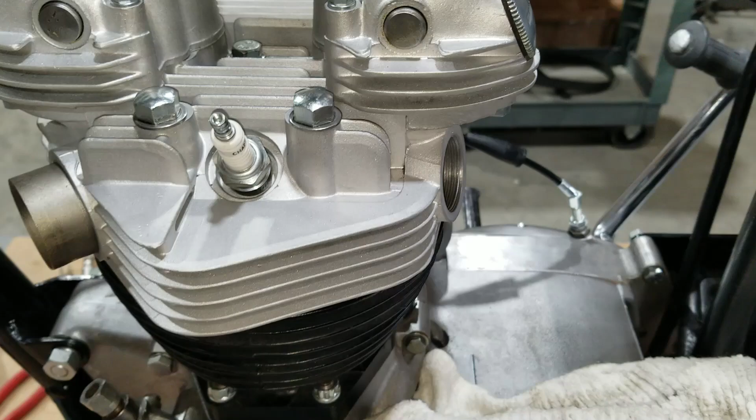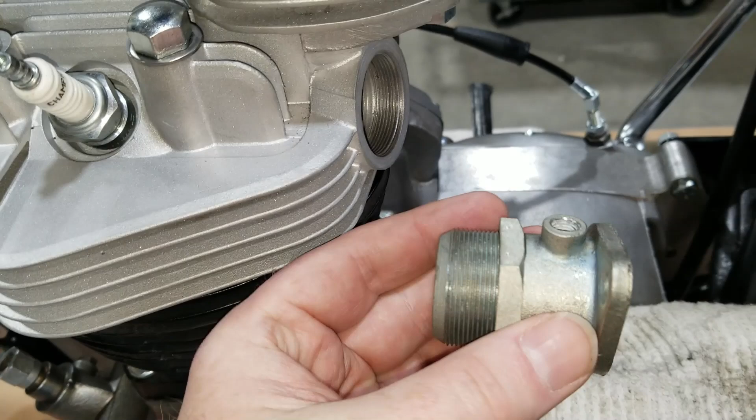We're going to be working on putting the manifolds on for the carburetors, and they look like this. When you go to put these on, you can't have the crossover tube in here because it'll bang into the rocker box. You want to run these in as far as you can, then use the nut to tighten it up, and make sure the carburetors are straight when you do that. We'll show all that coming up, and then we'll probably do some other stuff like the rear fender, and the bike will start taking shape here. So let's get working on it.

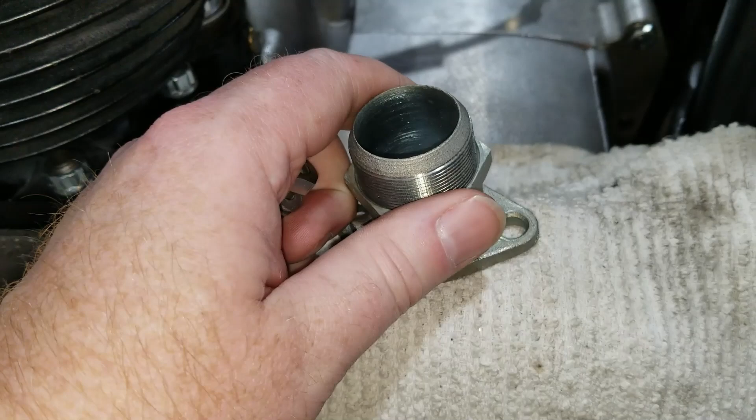On these manifold pieces, this is a 68, an older style. In 69, they worked on putting a stud in here that would come through and out. So this one gets a bolt, a special bolt, a hex nut, and a couple washers. This bolt is so special that the head is really small, so it clears everything here. And there's like a 1.5 inch nut here, and you need almost like a special wrench to get in here and do this. So we'll have that out too and use it. But I just want to point out the difference between 68 and 69 here, this part.

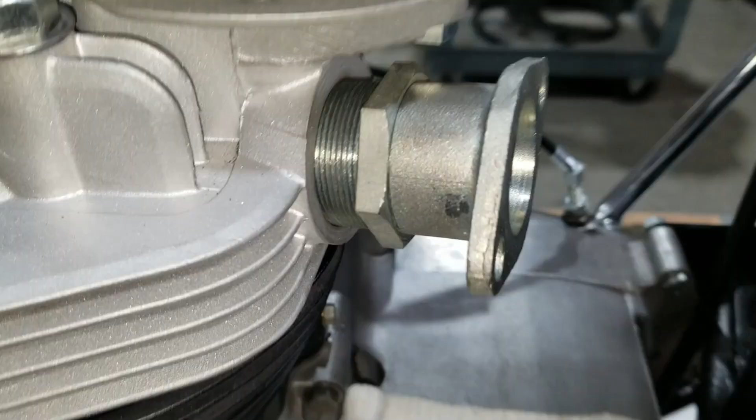When threading these on, we've got to make sure we put the right one on the right side. This crossover tube goes to the bottom, not to the top. Otherwise you'd probably have a problem, and it needs to be facing inward, not outward. So we'll thread it in as far as we can, and then make sure it's parallel with each other.

Okay, that's not going to work. So we'll have to back it off to about here, and then we'll go from there.

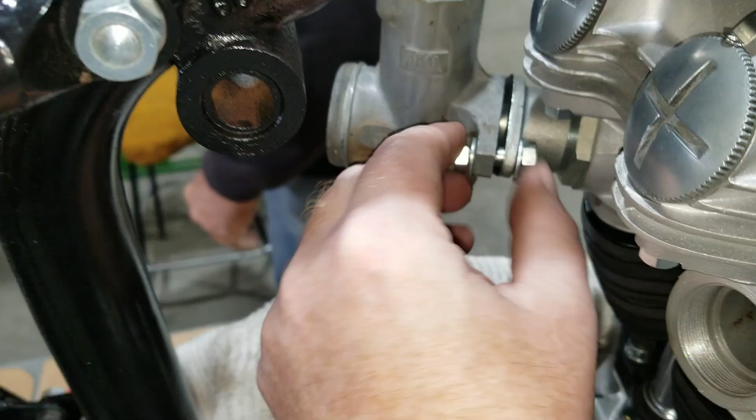Okay, so I can see why they went to a stud in 69. We got to tinker with getting this all together with the big old sandwich here. And of course, we didn't put the fiber insulating block in there, but we're using a body of a carburetor to help us with getting this parallel.

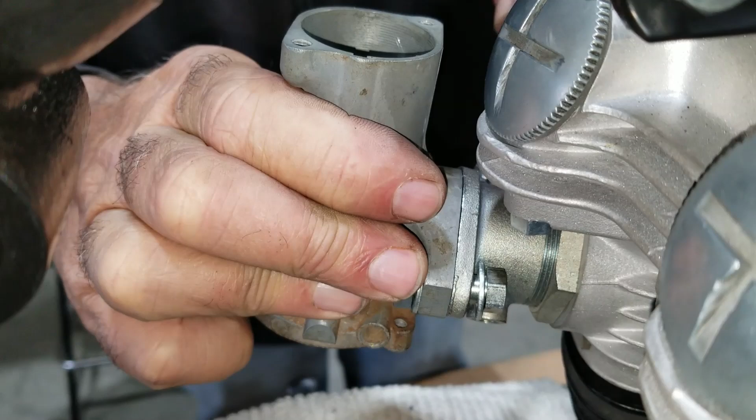So we're going to finish tightening this up to where it's flat, and you push down. The reason why we're doing this is because we don't want this carburetor to be crooked just a little bit. We've seen other bikes where it's just a little bit off and it looks funny, like tilted one way or the other. And that's not what we want. So we want it to be flush or flat.

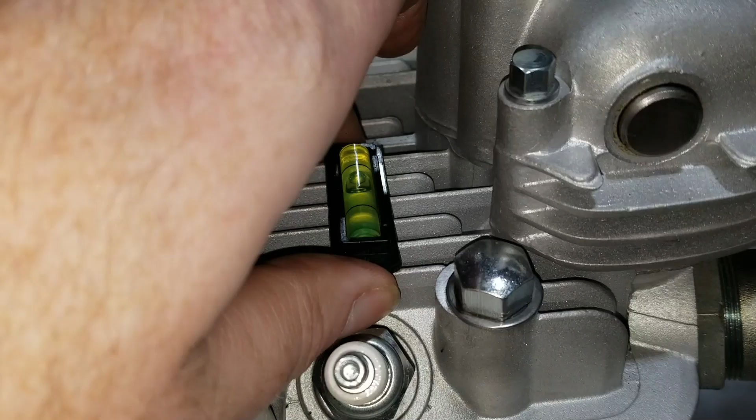Okay, now you're going to have to help over here. All right, so we're going to make sure we're starting off level. I got a little level piece here. The motor's level, and that's showing that the motor's level here.

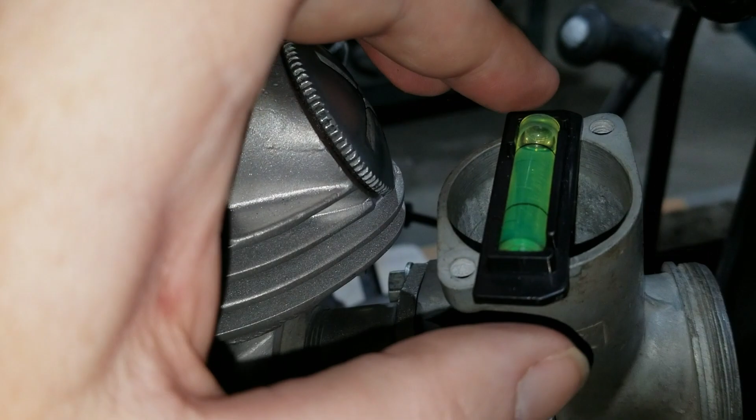Now we're going to take this thing and set it on top of the carburetor body, and it'll tell us where we need to be till we're the same as the engine. So somewhere there, yeah, right about there. A little more. There, it's right in the middle.

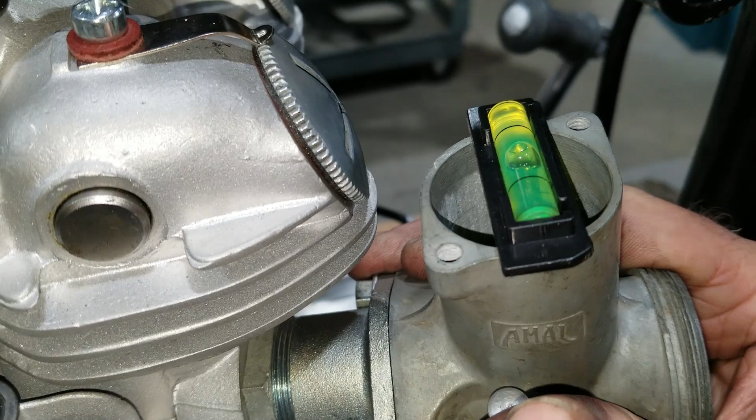Okay, now we've got to tighten this nut up without moving all this. So let's work on that here.

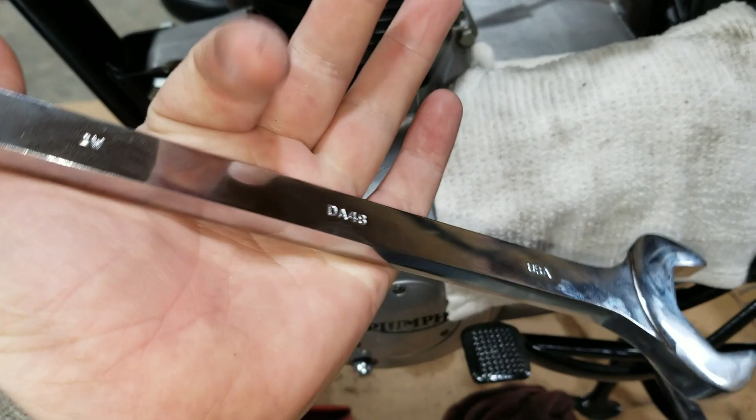Well, here's kind of the special wrench we got to do this with. It's a Mac wrench, it's just got special positions where the heads, the open end parts, are at, so we can get in here and clear the rocker box and everything in certain positions. Seems to work out pretty good. We have this one set for right in the middle.

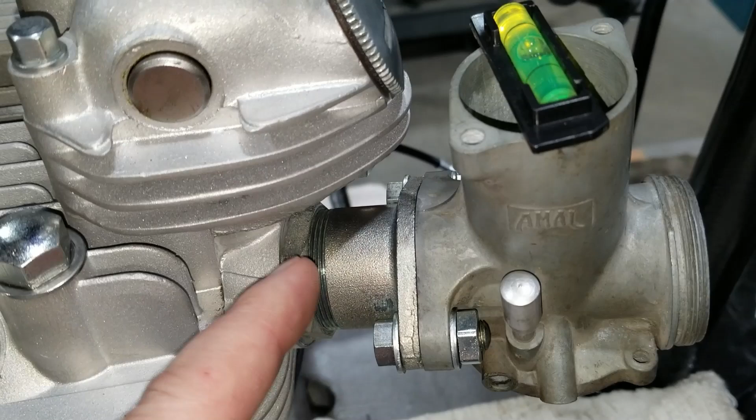We'll try to video record us doing the next one. It's kind of difficult because you gotta compensate for this wanting to turn as you're tightening that. So you gotta put this at a weird angle and then hope that you line up when you get this tight, hope that it ends up being here. You have to do it a few times probably before you can finally get it, because you want that to be as tight as possible.

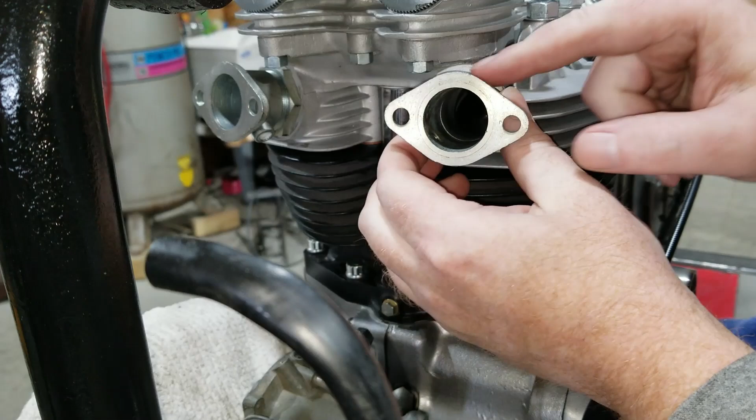Okay, so when we go to tighten this one's going to want to rotate this direction this time. The other one wanted to go the other way, but we're going to have to start here. Well, it was still the same way, just we're going to start over here at a different angle, and then when it tightens up, it'll be like where we want it. So let's...

And I definitely like the 69 style manifolds more than this one. I guess we could have ordered those. Yeah.

When he redid the head, he took them off, of course, and they were all rusty, and I just didn't want to have them all rusty looking. And you got the hex nut up there? Yeah, I got mine.

All right, with pushing down on the carburetor body, we could know that we're like flat against the surface there. There's a little bit of wiggle room on that carburetor body, so we got it tight.

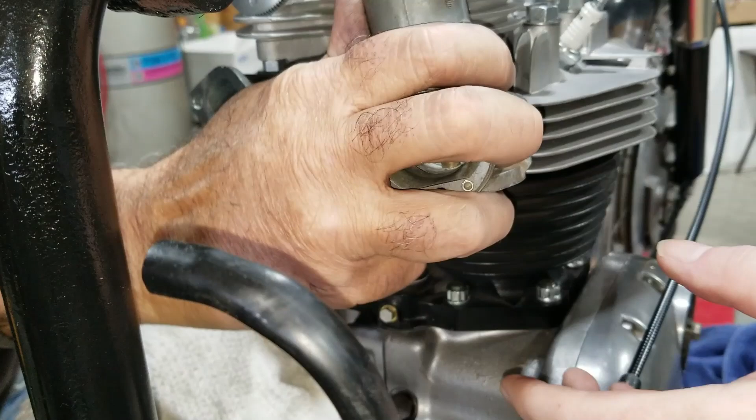All right, so we're gonna put it on there like this and see how close we get here. Got the carburetor at a massively crazy angle.

All right, that's pretty tight. Where we at yet? Oh, too much yet. Yeah, you need to, wait a minute. This end needs to go down. So it either needs to go tighter or you need to move the carburetor.

Yep. Yeah, I was able to get it tighter. Hey, we got it, looks like. Yeah, I'd say so. No, too much. Needs to, gotta have this square. Yeah, okay, we gotta go some more yet. It's gotta...

Raise. I don't know if I can. I don't know if I can get more out of it. Let me just check it. Don't strip it. Yeah.

That tight, see? Yeah, that's pretty tight. That's way too tight.

All right, so I just got done tightening this down. Just gonna check it again. Yeah, it's pretty tight. Anyways, we loosened these bolts up too to do the fine tuning, and we can kind of get it.

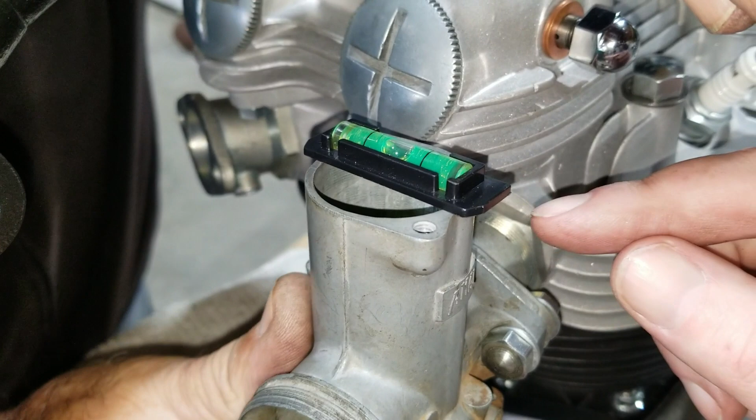Yeah, looking pretty good. Yep. Yeah, so we got this pretty much in the ballpark, a pretty good spot for this flange, but then we can wiggle this around a little bit, and we can get it right in center. So when we go to put the real carbs on, we'll be able to tinker with this and get the fine-tune adjustment in.

Then we go to put our slides in, the top there, and that's when we'll do this measurement again and see where we need to actually line this up and then tighten the carburetor down. But we have these in the spot where we need them at now.

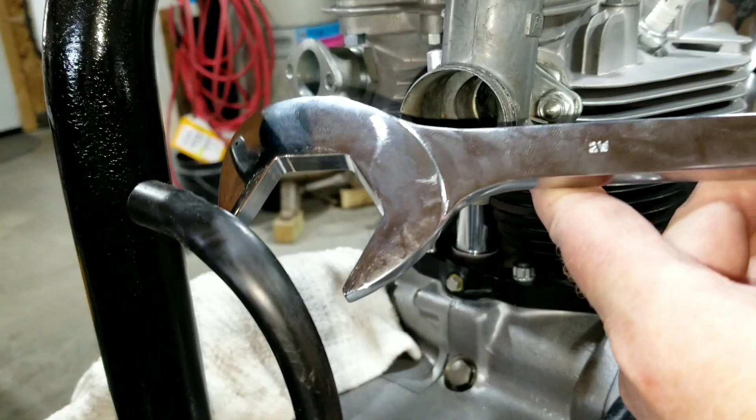Next, we'll move on to putting the little ports in here and put our little hose on there. And if you like that wrench that we used, you can look for it. It's the part number for the mech is DA48, and it just seems to fit really good in the spots here.

Anyway, so 1.5 inches. Okay, so here we go. We got the nipples installed there, and we have the equalizing tube installed. This helps with pressure in each, equalizing it, on each port.

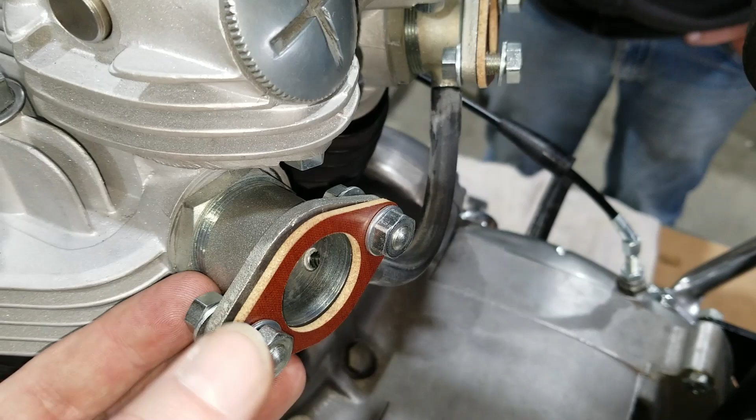And these port flanges here are pretty much the same on all the monoblock and the later Amals. They're all the same here. There's different ports though, because some of them don't have the nipple here, and we obviously know the difference between the 68 style and the 69 because the studs aren't here in 69, and like the 71 head and stuff.

We were getting ready to put these on, and my father was like, these don't look right. I had to verify that they were the correct ones, 468s. That's how I got them.

And pre-unit ones are different. Also, they don't have that crossover port either. So, and I'm pretty sure all the diameter here is pretty much all the same, but I'm not for sure on that. But anyways, I have all the hardware laying here so I don't lose it when we get ready to put the carbs on for good.

And yeah, I think we'll end up moving on to putting the rear fender on next.

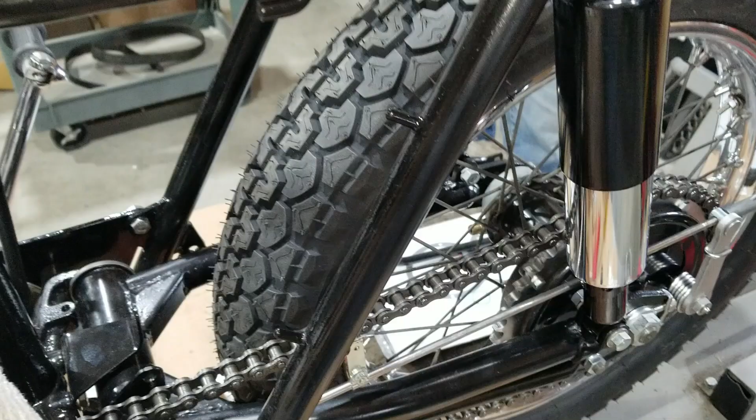Alright, so installing the rear fender here. We're going to put it in here like this, and then we're going to put this bolt in right away here. Then we'll go from there.

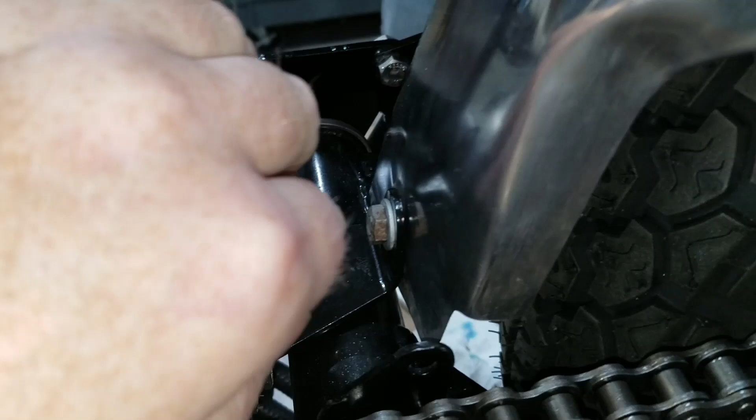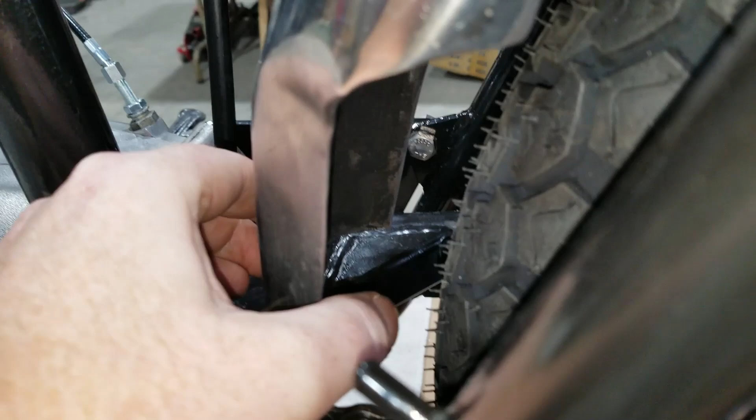Alright, we got this special bolt in here. That's the 82-0929. It's a specific length. We don't have it tight yet, but it's a specific length because they're all concerned about threads hanging out. But there's plenty of room here, but it is what it is. They don't need an excessively long bolt there or too short. So...

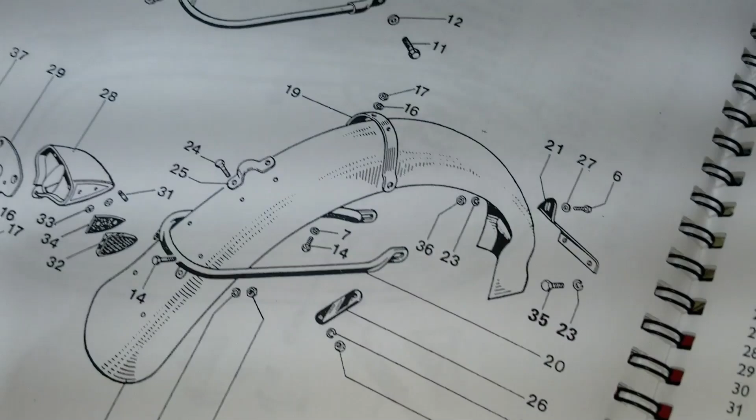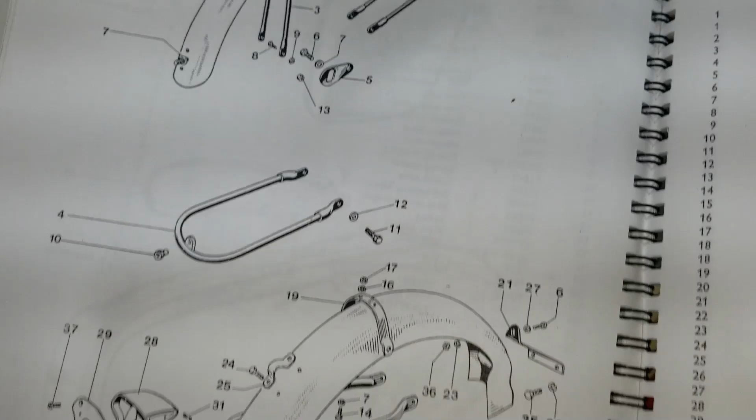And then on the top here, we're going to put these two in. It's a DS57 domed head bolt. It comes in from the bottom according to the parts book here, number 14 here. Then there's this big, it shows a small washer, but this is actually an F4299 big fender washer specific. It's a specific same washer that gets put on holding this piece on, remember the front end. So that goes like that, come up from the bottom, and it has a plain washer and a hex nut on top. So we'll put them in real quick.

We got this rear loop installed, and it's got special head bolts here. I put a washer there - I don't think it shows in the print. And I put this here so it doesn't tear up the paint when we tighten it up. There's a little piece underneath that helps hold it tight.

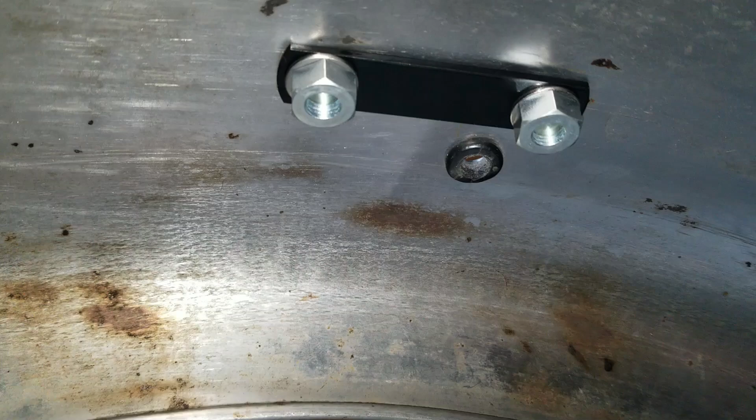I'll show you that - there you are, that's what it looks like underneath there. Put some washers down there too. Helps keep it strong when it holds it back there.

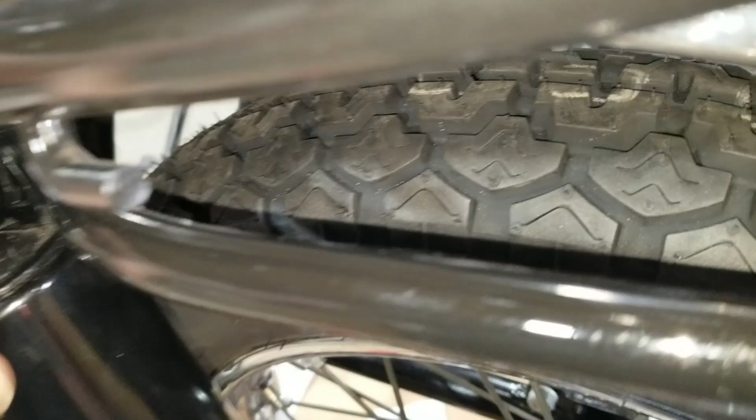Now we'll put the loop on and go from there. Here we are, we got the loop, the rear handle or lift handle installed, and it mounts on one of the shock top bolts there, just like that. And then it takes a DS57 bolt, just like these up here were, and two of those, and it looks like it's lined up pretty good.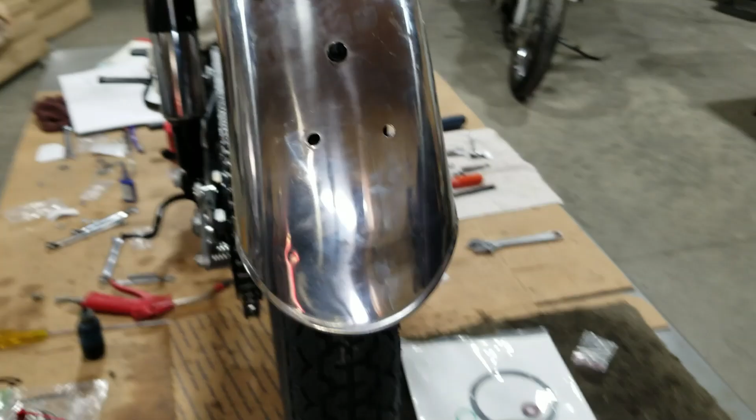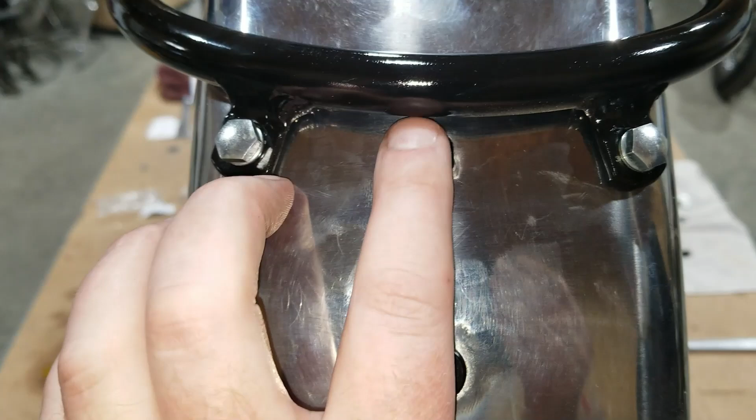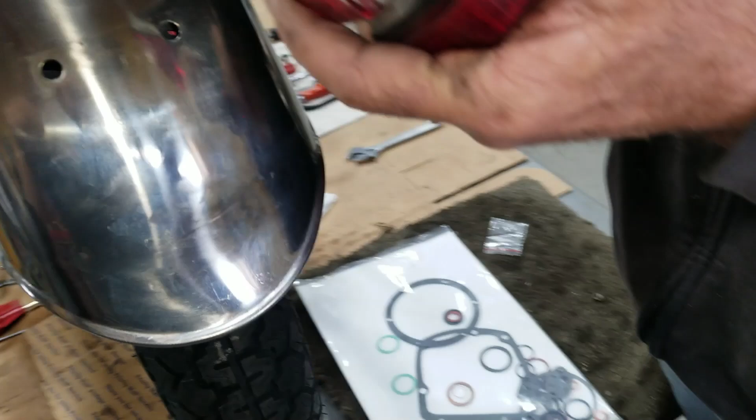Okay, something else is we got the center of the tire here. This line is like the center of the fender, and we're gonna check out the taillight right now and see if we have an alignment problem with that. Now, this is an oblong hole, it should have some room for adjustment, but we'll see. And it's got a divot for this piece up here. I'm gonna put these two wires down this hole here.

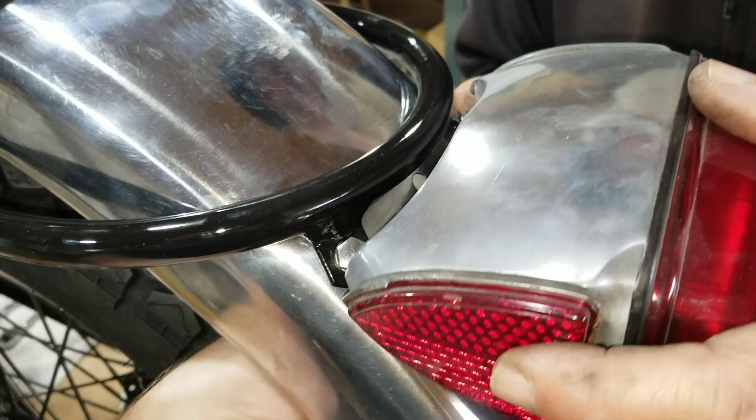We're gonna pull them out. Yep. Yeah, looks like it's gonna line up.

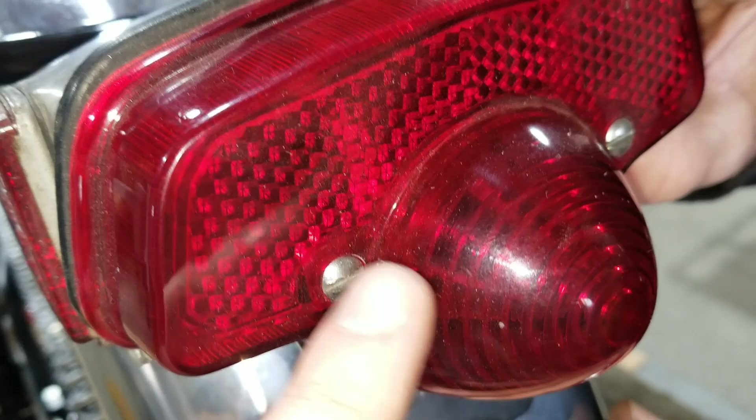Now we didn't really rebuild this much, I just polished this up, made it shinier than it was, and changed out the bulb to an LED. But this is not the actual original - this is a different lens on it. I took the nice cracked original one off, got some different ones, but we put this one on.

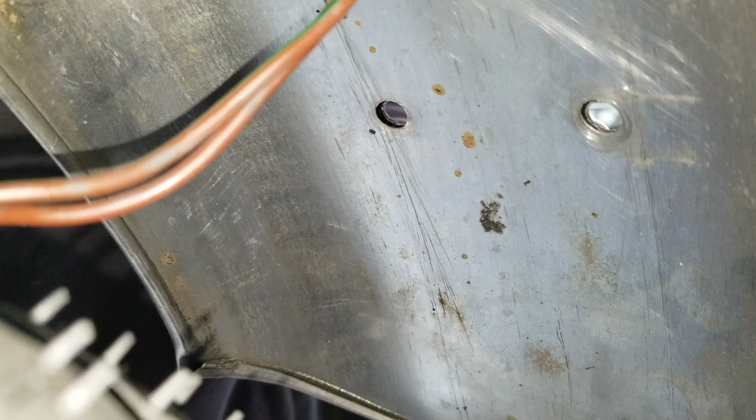And all the bolt holes line up, perfect, yeah I think they do. I'll see, looks like they should. That's not it, that one came through the top there. Yep, and that one there. Yeah, the two bottom ones. Yep, perfect, perfect. We could probably put this on now if you wanted to.

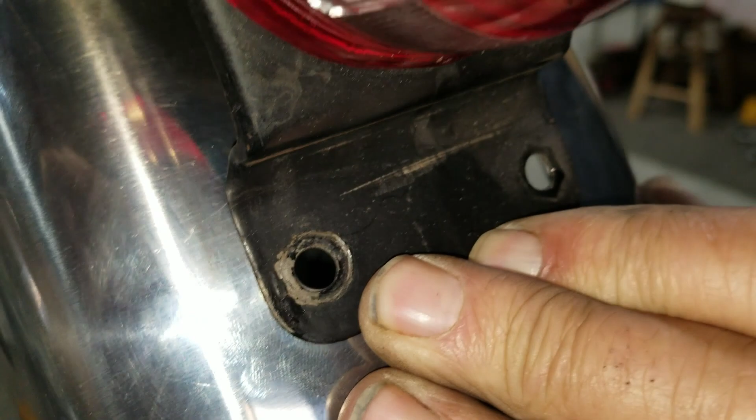We could, but we'll tighten this stuff up first. Yeah, we gotta get the fender tight first, that covers these up a little bit, or makes it hard anyway.

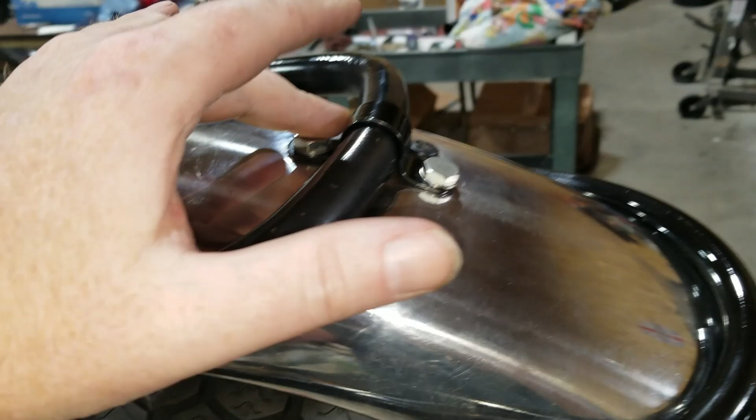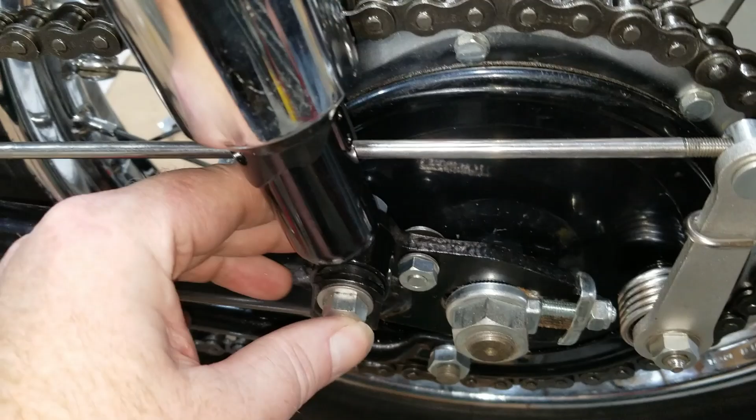Okay, with everything being tightened down now, we started out tightening up this, then we went here, then to this one, then finished up here, and then tightened up the shock bolts. Everything's tight here now, and up here on both sides, so we know this is all complete and don't have to worry about trying to remember if we forgot something. Now we can move on to something else here.

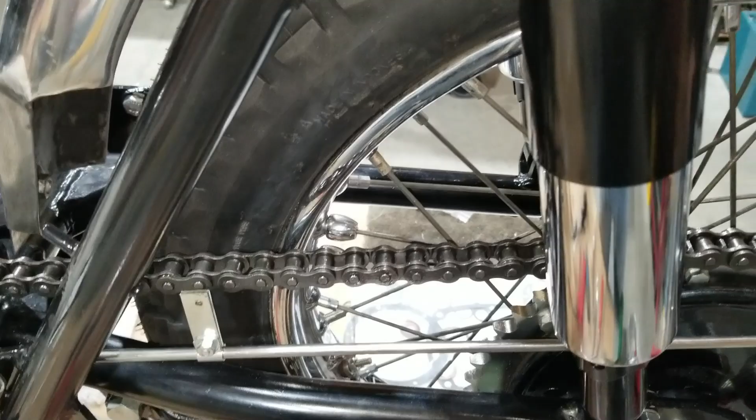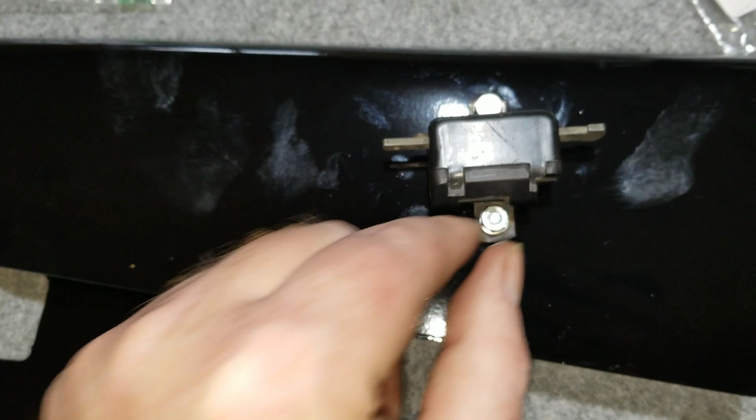Yeah, see what we got. Got the chain guard sitting here, we got it all kind of ready to go on the bike. We got the brake switch installed, we tested it with the ohm meter and it does beep, so we're good. I ran the bolts in from the inside out, that way the threads from the bolt weren't hanging out, and the thick part was on the outside instead of the inside because of the chain and stuff.

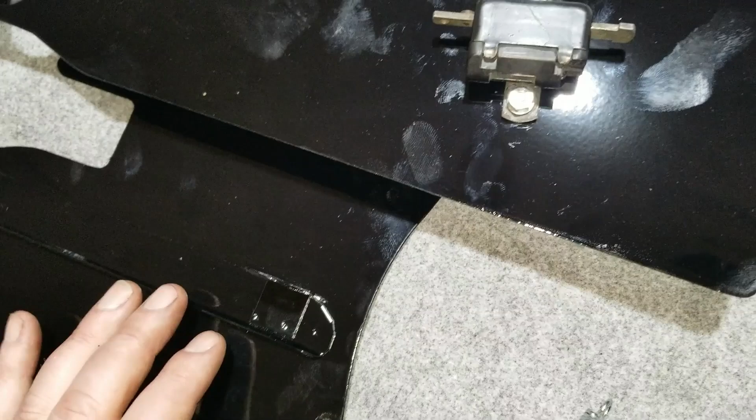And yeah, we're gonna try to attempt to put this on. It's got this extra guard here, it's gonna make it difficult. So there's probably a certain procedure for putting this on, and we probably maybe should have put it on a different time than we are right now. So we're gonna find that out real quick here.

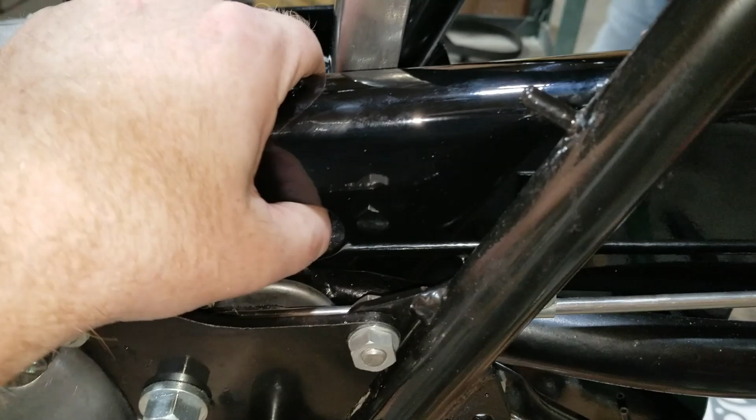There we are, we got the chain guard installed. We had to remove the rear wheel, and I guess there's no special instructions here other than removing the wheel first, installing it and the chain, and then you run a bolt in here. It's a 1/4 inch bolt and nut. I put the bolt going outward so the excess threads are on the outside of the chain guard, so the chain does not come into it and hit it, because it gets real close right there.

And here we got this tight, and it's ready to go too.

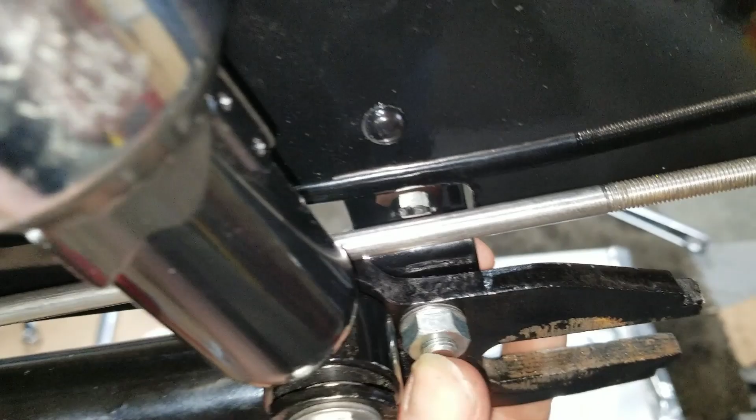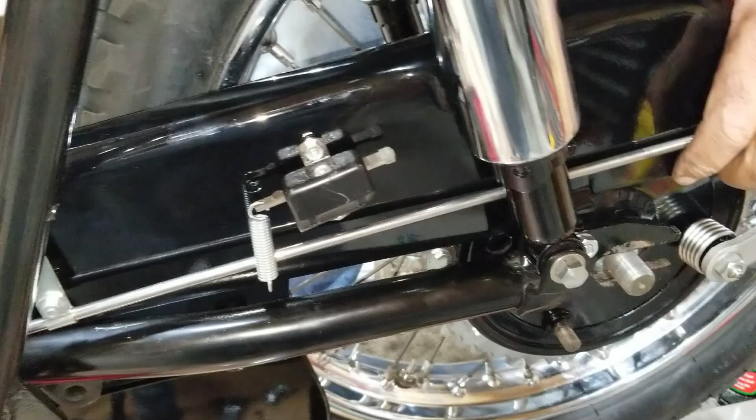Okay, so we had it on there, I just showed you that it was all tightened up. You cannot get the wheel in that way though, so I had to take it back loose. Okay, so everything's loose, and we got the wheel in where it's supposed to be, and now we're just gonna work our way from here. Leaving this loose, now we have it in here, so it actually fits in here.

And we'll start tightening this up by putting the rear wheel in here and the adjusters in. Get this in the right position, and then we can put the front bolt back in.

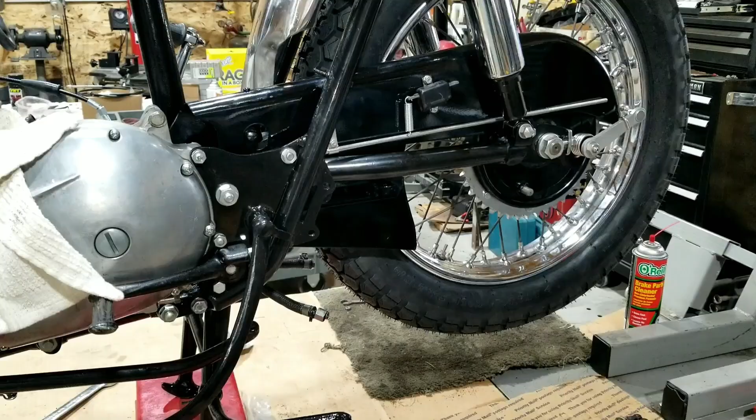Get chain back on. Okay, so here we go. Try to record doing all this right here. It's interesting, so I just want to show it in a way. We're coming across trying to figure out how to get the chain in. We got a couple different things. We got this bolt installed here so far, and this is all loose back here. We have this set down here, and the other thing while we're working on this, there's a bracket here that mounts onto the rear stay, and it has to have this little P-clamp installed here. So we have that ready to go now.

And yeah, then we got to fish the chain through. So I think right now we're at the point where we want to maybe install this and tighten this up, right? I got it just snug there. So you got all this, we have all that assembled too, yeah. So it's ready. Now all we got to do is let's put the brake stay on now, that way it stops moving, and figure out which way it needs to be.

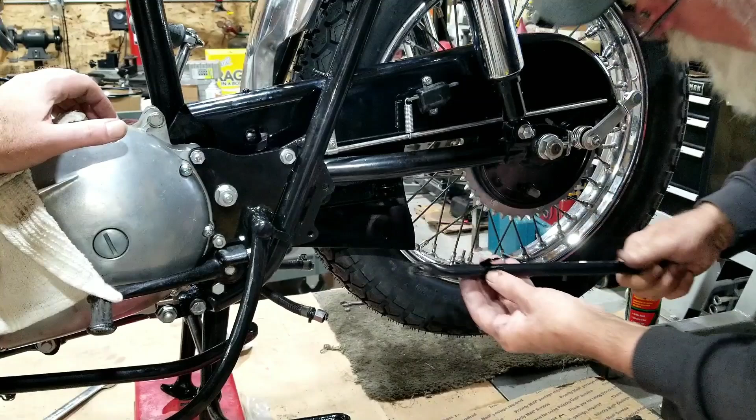Yeah, it shows one way. Just like this. Okay, yeah, and then we got the bolts. No, that's way out too far. So it must go. Okay, hold on. It goes like this. It goes like that. I don't know about that then either. It's got to twist over.

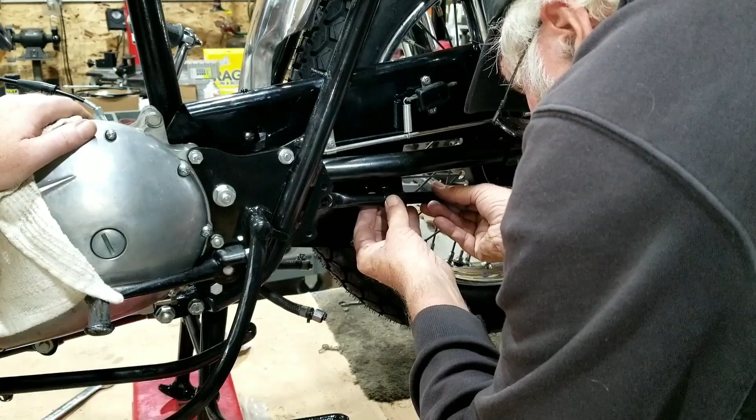Yeah, this. Like that. Oh, it's got to go back. Can't be that far out. So it's got to go on top. Go like this. And have to go like this. You want that bolt first? Gotta go like this, but this way, the hole's way out here. Yeah, we can't have that because there's no spacer that goes there.

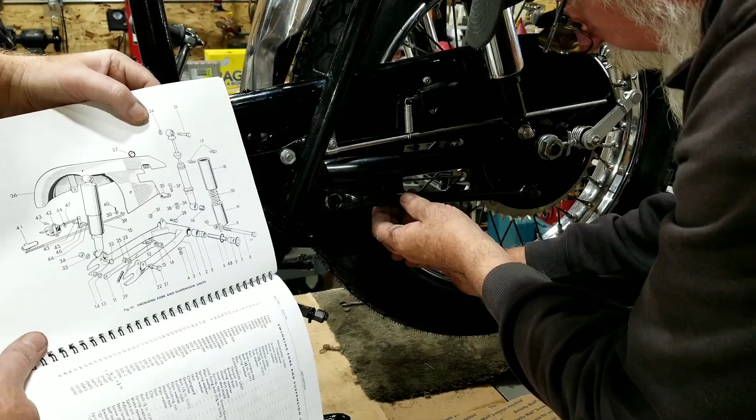Bracket's way goofy. Unless the chain guard has to be pushed in with that thing. Yeah, maybe. Could be, I guess. The parts book shows it like this. I mean, it's just a generic picture, but it's kind of showing everything. See how it's like looped upward? Well, it lines up here. Well, then we got to flip it this way and then set it on top of that. And now we're up so high, it don't line up. See? So that picture can't be right.

Okay, it's got to be below it. I think that's what that is in the picture, but maybe not. Because down here in the print, where the stay's at, it doesn't even show it. So, you know, I think it'd be next to this piece instead of way up here. I don't know. Or snug? Yeah. We got a lot to do yet. Now we're going to check the tire, see. Oh, it's not rubbing. Oh, okay.

Now we have to do this. Oh, yeah, we install that. Put this all back, it's in there. Yeah, in the previous videos we went through all the trouble of getting this all set up, but look, there, we'll tear it all apart. No, don't turn that while I'm turning this. You'll scratch your chain guard. Yeah.

Okay, now check it, that's pretty close. Okay, now, oh yeah, we got good daylight in there. Okay. Yeah, we have that tight now, and we'll have it snug on. This is getting there. We got to tighten this bolt up yet, and this one. Yep, gotta do that before we put chain in it, I think.

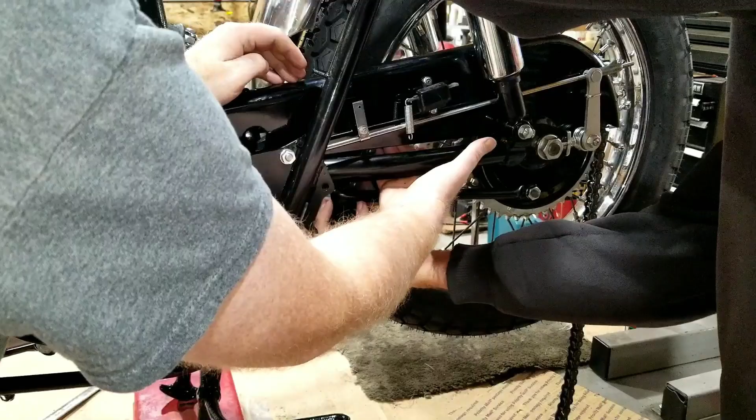Gotta get it up above there. Almost need a wire. I think we're gonna have to take that back off. Well, yeah, unless we get a wire and pull it through. Got something like that? Might. There it is, got it. Oh, now we gotta go to the sprocket.

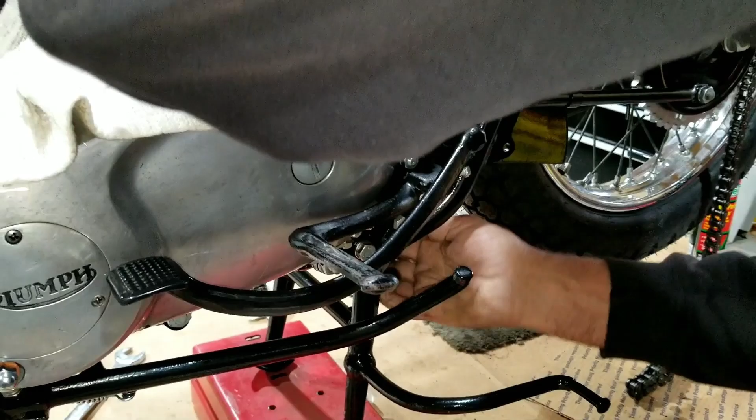Chain should start coming out the bottom here pretty quick. Yeah, it's already gotta roll the wheel ahead. Okay, this skirted fender, or skirted freaking chain guard, roll the wheel ahead, is kind of an interesting thing.

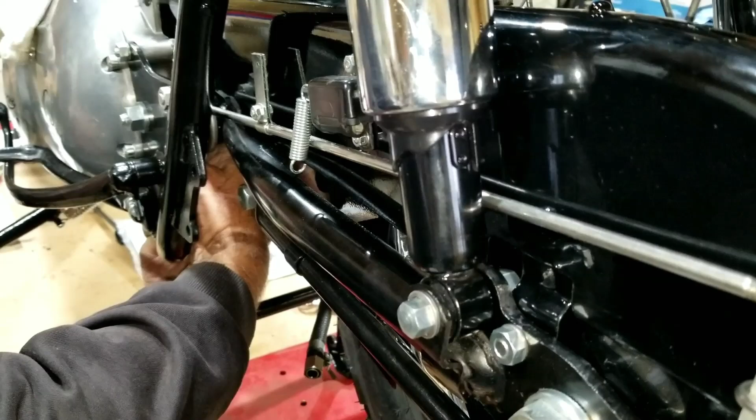Okay, I got it now. There we are. Wow, skirted chain guard. I can see why some bikes don't have it and some do, and the ones that have it are kind of a pain in the butt.

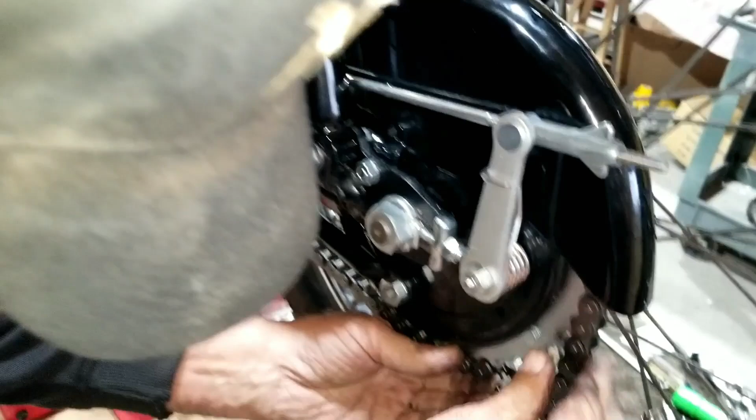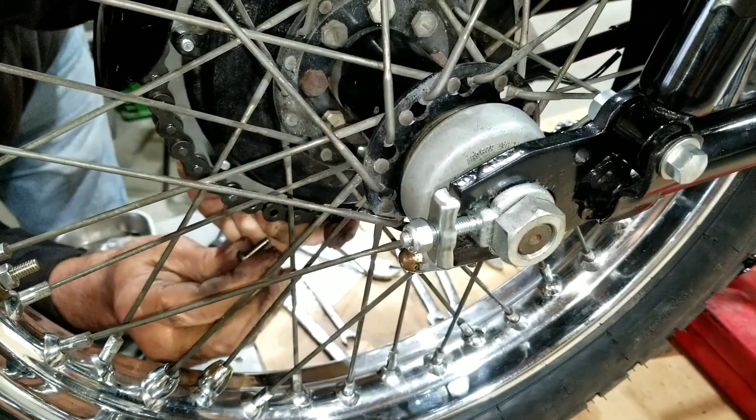I wonder if I can get this back on without the wheel being loose. I might be able to do it this way. Where is it? Come on. Yeah, you're right there. There you go. Got it, okay.

There we are, we got everything tight. Just got done tightening up the rear axle. Oh yeah, I thought we tightened these up already. No, we snugged them. That's right, we snugged them, and there's enough free play in the chain here just to clear that bolt, so now we can tighten it.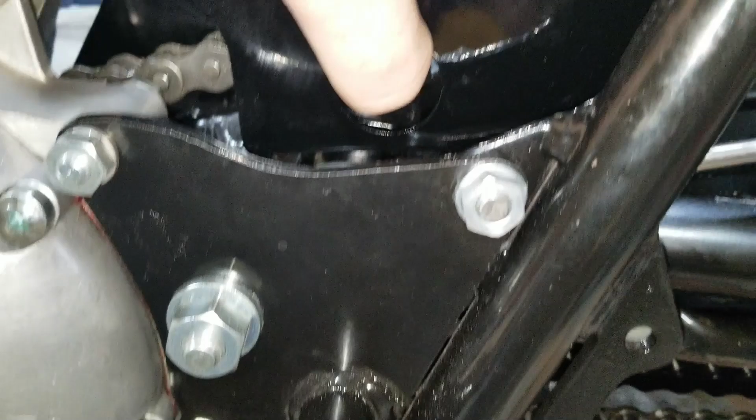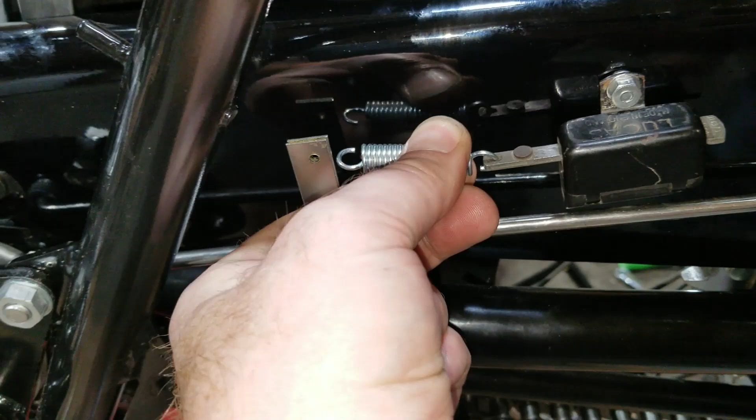And then this plug goes in this hole, so we'll put that in. This was kind of in the ballpark I guess, because I put it in the same spot as the other rod, but when I got to put this new spring on, it's real close. This is a strong spring, and we don't want too much pressure pulling on the switch here, otherwise it could be a problem too. So we might have to move that just a little bit. We'll work on that coming up.

We have to adjust that when you have power, so that you can get the light to turn on just at the right spot. We don't want it to turn on just by touching it, and we don't want it on all the time, or never on. We know this switch works because we tested it with an ohm meter, so we know we're good there.

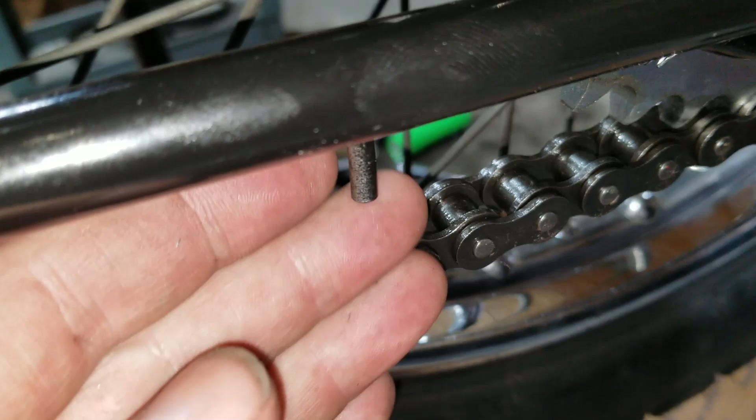So yeah, it looks like we got this rear brake stay in the wrong spot. We must have flipped it at one time or another, or maybe we started off bad. This is supposed to be up, and this is supposed to be coming into the chain right there, and it's not right because it's not even lined up. So we got it backwards right now, and it misses completely.

All right, we got the brake stay set up right, and we had the oiler set up correctly, because this actually lines up now with the sprocket and the chain. I think it was part 12 I talked about how it went, and it looks like I might have had it wrong in that video. I didn't take a picture of this originally when it was on the bike, and they might have had it wrong too, but also it's hard to tell. The parts book doesn't quite show this detail very well, and it's just one of the things I overlooked.

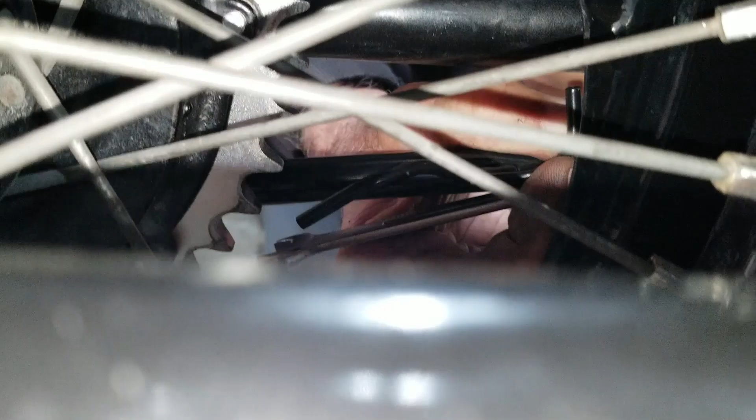So just make sure you have it this way, where the hose actually comes out and lines up with the chain. Here's another view of it. It's hard to tell maybe, but it is right flush with the sprocket, see how that is, it's in the middle of it.

So when it does drip, it'll drip right to here. You'd put a hose on it and cut it at an angle, and where it's supposed to drip is down here, and it would almost rub on the chain a little bit, right down in here. You'd put about a 2-inch piece with a 45-degree cut on it like that, so it would rub on it, and as the oil goes on it, it lubes the chain without getting everywhere else, all over the place, ground and everything.

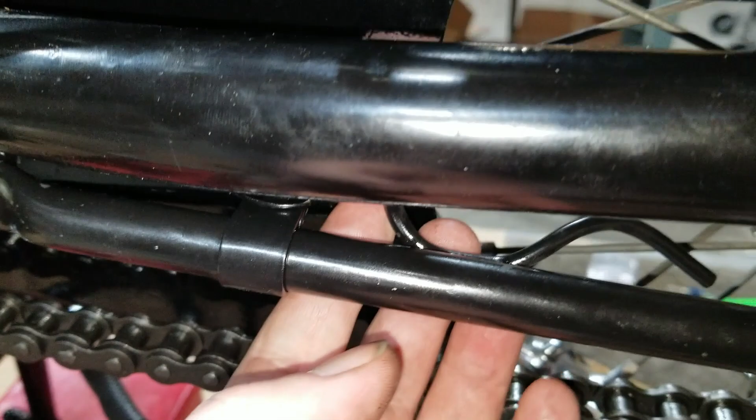And then the other end of it, of course, back here, it goes up and goes to the... In fact, didn't the parts book call for a 3-inch piece right here? I don't know, it did, for sure. I could look it up.

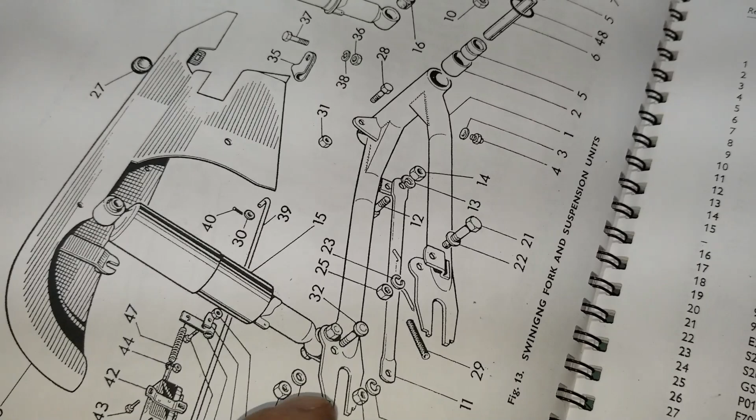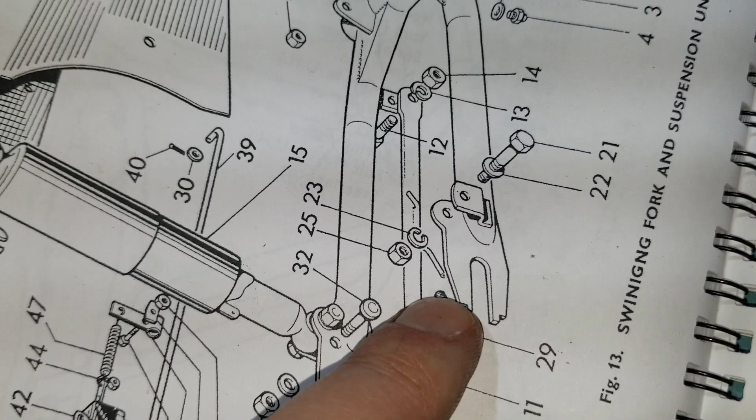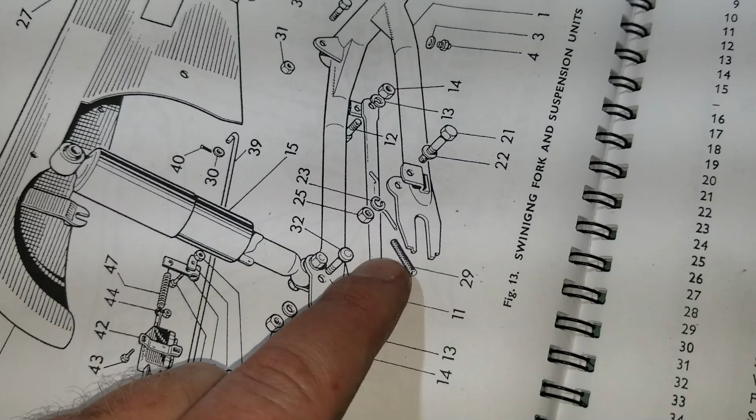Alright, so here's the parts book again. It looks like I should have referenced this a little bit better, because you can see this brake stay here, and the tube is going kind of upward, and this one's kind of hanging down and going slanted to the back, just like we have it now. There's that hose I was just talking about, and there's an actual part number for it, but this is like a 58-year-old motorcycle, so if you do find an NOS part for this rubber tube, the rubber's going to be hard as a rock probably. So you just gotta get something that fits on there and then trim it.

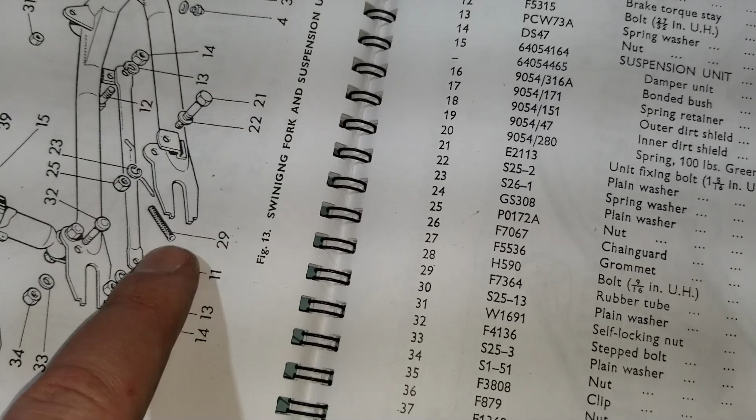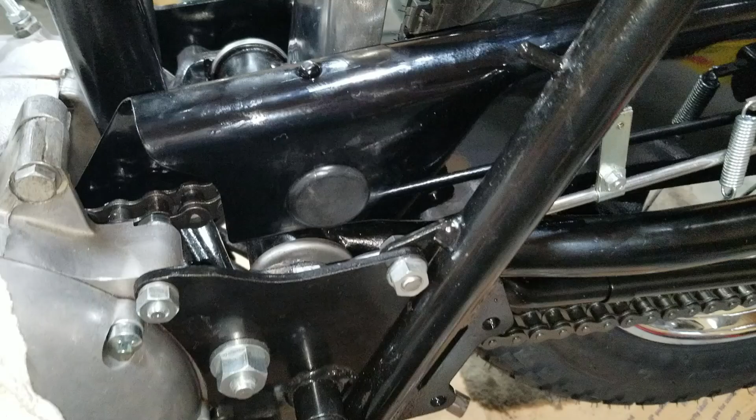So we did end up having it the wrong way earlier in part 12, but we got it right this time. With putting the chain guard and all that stuff on, it really made for a long video here, but it was quite a big subject, so I'm glad I showed everything here. But we got the plug in now, and everything's tight, and we're good to go on to the next stage, the next video. Hope you enjoyed everything, and we'll definitely see you again soon.